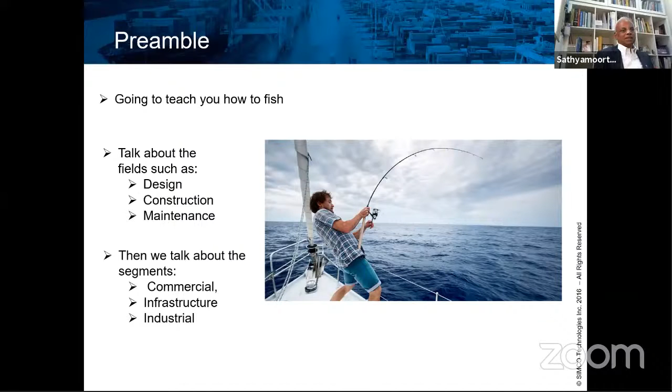Having said that, I'm going to teach you fishing. I'm not going to give you the fish. And all of you understand what this means. I shall be talking about fields such as design, construction, and maintenance in civil engineering. Then we will also talk about the segments: commercial, infrastructure, and industrial. It's a wide field, and let's go through that.

What are the merits of being a civil engineer? As the cliche goes, it's the oldest profession. The oldest profession in engineering is civil engineering. And the moment somebody put a roof over the head, we were in business. This is from the Stone Age, and you all know that. Civil engineering is also called the mother of all branches, and you will see it in the next slide.

Why I mentioned this is because I didn't even know other branches existed. I will tell you why. But before that, if a doctor makes a mistake, maybe he kills one patient. If a civil engineer makes a mistake, he could kill hundreds of people. So with that responsibility, being a civil engineer, I request you all to feel proud that you are what you are, and you are going to be what you are going to be.

How did I become a civil engineer? The purpose of this is to share my experiences and then guide you based on the experiences I have had in the past 40 plus years as a civil engineer. I come from a lower middle class.

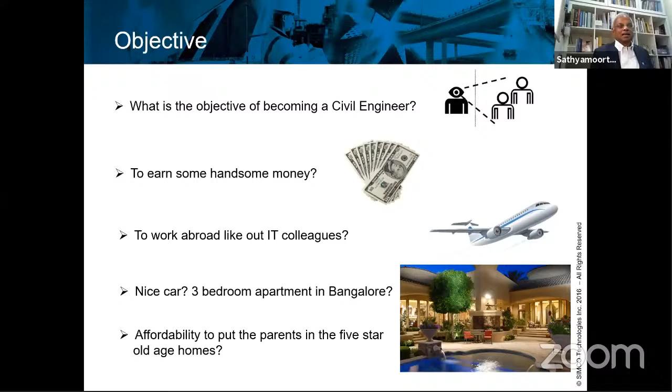Because when I was in India last time, I saw an old age home which was really looking like a five-star hotel. And I asked the guy, who are the people who could afford this? He said the children are all in the US and they put the parents here. Now, is that the objective?

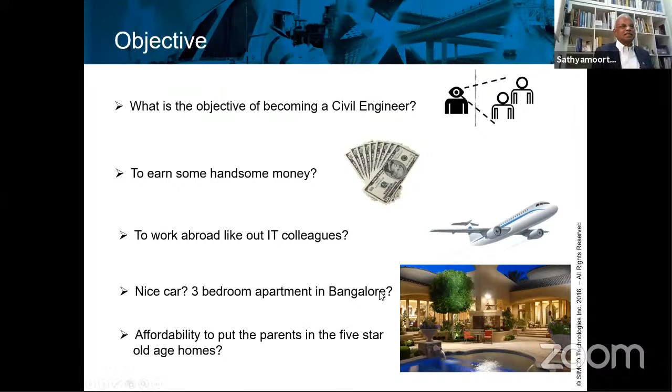Okay, let us introspect. Let's put priorities. My first priority that I want you all to think about is that you want to be happy in your job. That is the first thing I tell you. Money alone does not bring you happiness. See which job makes you happy.

I'll just give you an example. I was a civil engineer in the construction field for some time. And then I was picked up again in my life. Many accidents happen, all with good results. One German engineer picked me up to become a concrete repair specialist. I came into this field in the year 1990.

30 years down the line, I never left that field because I loved it. I'm very happy in that field, that I could contribute something to others. And I'm sticking there. I'm happy. I'm 70 years old, still working and going strong. Why? Because I'm happy in my job.

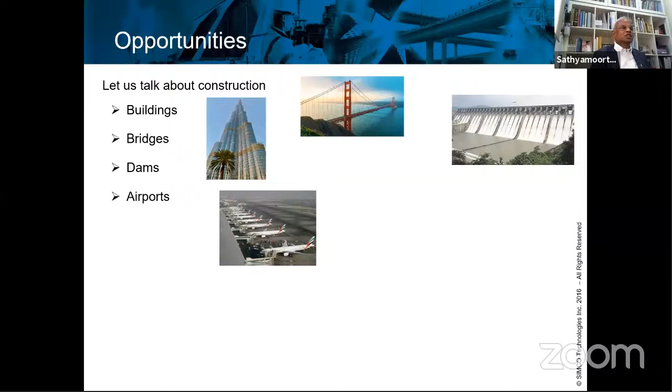I will talk about the airports in our country, how these are coming up. I have seen the airports in our country, how these were 20 years ago and what it is now after they brought in this PPP program, which is the private and public participation. The airports are to international standards and these are expanding. They're spending a lot of money on this. Everything gives us opportunities for a civil engineer.

Seaports. Now there's another special subject. Building something in the water itself is a challenging one. Not like when you go start working at a building site, you pour the foundations, you pour the slabs, you pour the beams. But when you come to a marine structure such as a seaport, the kind of opportunities you have to learn and practice and be unique is enormous.

Metros, more and more metros are coming up. I believe there is one in Bangalore as well, though I'm not 100% sure about that. I have been invited to take a look at the metro in Chennai because they have some problems and they asked me to come and inspect. Hopefully whenever the airlines open and I'm able to travel, I'll be coming to Chennai to inspect that metro. This metro, structures like this, you have over the ground structures like what you see now, and you have under the ground structures, because metro trains go over as well as under. Each construction is very unique and very special.

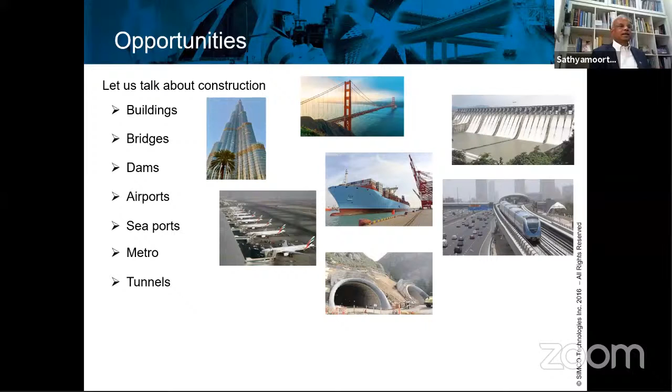Tunnels. It has been in the news quite recently. This is a picture of Atal Tunnel, which has been opened quite recently by the Prime Minister of India. There was a lot of discussion on the media because people reported, hey, it's the longest tunnel in the world. Then some people started saying no, this is not the longest, you have one in Europe which is more than 25 kilometers long, because this tunnel is roughly about 10 kilometers long. But what they meant by longest tunnel is that at a height of 10,000 feet, there are no tunnels in the world which are longer like this. This is 10 kilometers long at a height of 10,000 feet, because doing something at that height is a big challenge. You will be boring through the mountains. Again, another opportunity - I'm talking about the special opportunities for a civil engineer, where you can be unique.

Sewage treatment plants. The first time when I visited a sewage treatment plant, I was called there because the structure had a problem. The first thing that hit me was, oh my God, it smells so bad. But believe me, this is like a social service. If these sewage treatment plants function nice and good - because not only are there structures involved, there's a lot of chemistry involved. The discharge of this sewage is highly aggressive, full of sulfates, which is completely against a concrete structure. So what kind of coating you are going to be using, how the coatings fail, what problems you will see if you don't construct it well - these are all challenges that you face. These are specialty constructions, correct?

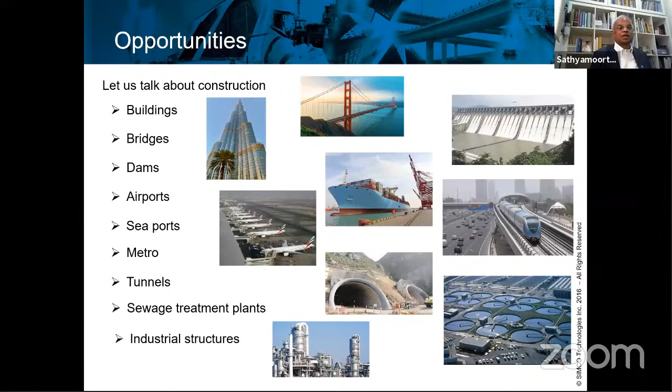The industrial structures - I mean not only the oil and gas, I'm also talking about non-oil and gas manufacturing. Not necessarily should it only be manufacturing downstream products of oil, but also now you have manufacturing of communication equipment. A civil engineer plays a role in building these plants as well as maintaining these plants.

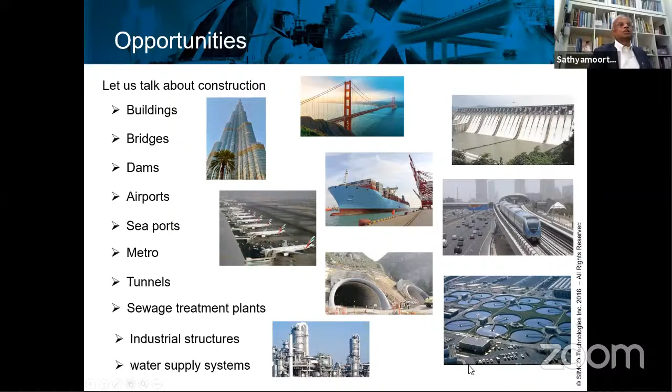And water supply systems - huge pipelines going above the ground, under the ground. Each pipe has got a joint. How do you join these pipes, which are 2 meters in diameter, without leaking? When you are passing drinking water through these pipes, how do you prevent the external groundwater from coming into this drinking water without polluting it? How do you prevent the drinking water flowing through the pipes from leaking into the ground? Excellent engineering that you can learn.

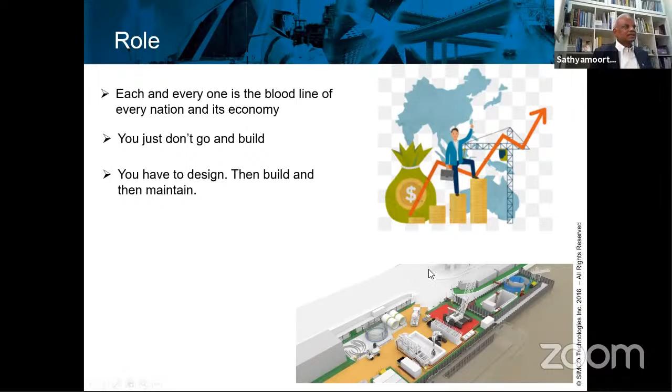Every role that you are going to play in the ones that I showed in my previous slide is a bloodline of every nation and its economy. A civil engineer plays a very, very critical role in building this. Now, are you going to just go and build? No - you have to design, then build, and then maintain. You will play a role in all three: design, yes; build, yes; and maintain, yes. Look at the opportunities, man. A civil engineer plays a role in each and every aspect.

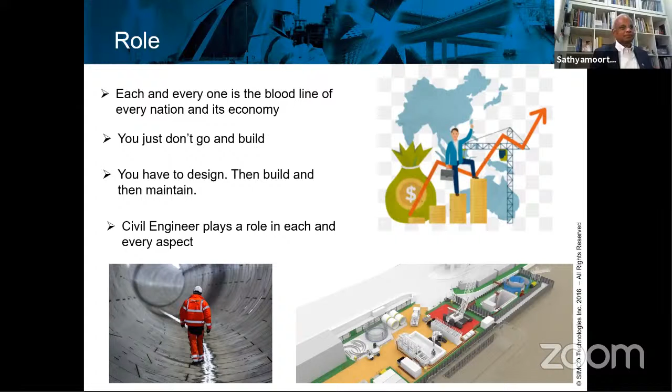When you talk about a design, here I'm going to take you through the specialties of design, not just a design by itself. When you talk about a design, what comes to your mind? Structural design - most of you are working with STAAD, etc. But how about a durability design?

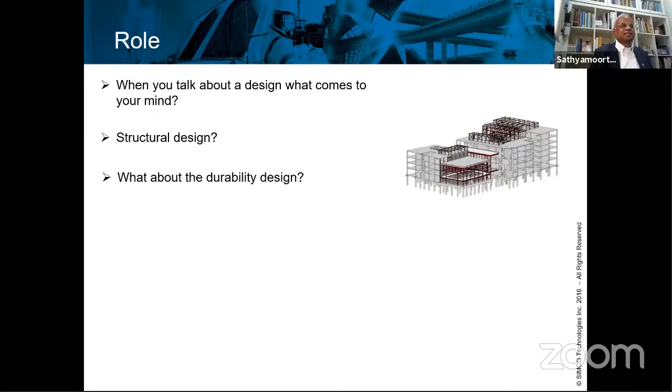I am sure you are touching base on durability during your studies, because when you are designing a structure like the one you see in this picture, you design enough reinforcement, the right thickness of concrete with the right compressive strength to make sure the structure is safe and won't fall down. But how do you make sure the structure is going to be durable for its entire life? That's durability design.

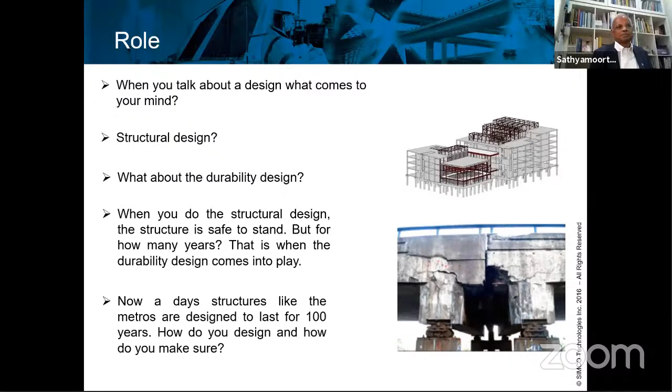We have tools available in the world which can predict the life, or remaining life, of a structure. For example, you have a chimney, or a marine structure, a quay wall or a jetty. The client wants to know: I built this chimney, I spent a couple of million dollars on it, what is the remaining life of this chimney? There is engineering available to predict the remaining life of a structure, which unfortunately you cannot do for a human being. You can never predict the remaining life of a human being, but we civil engineers can predict the remaining life of a concrete structure. That is possible, it's available now.

Construction industry is the second largest employment provider in India. I wonder what you must be thinking - who is the largest employment provider? Who is number one? It's agriculture. The second one is the construction industry, which provides the largest employment. If that can provide the largest employment, any number of civil engineers are not going to be enough.

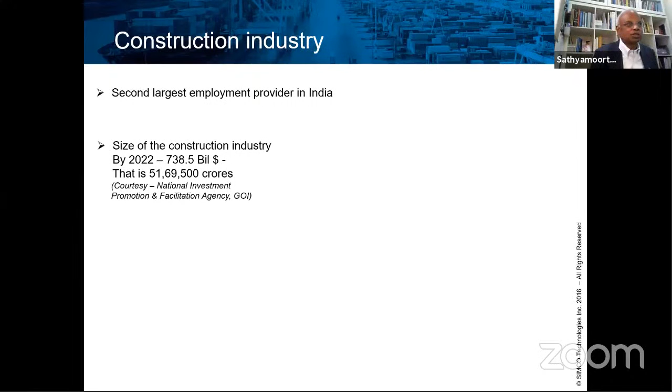What is the size of the construction industry by 2022? These figures are in spite of the coronavirus. They estimated it's going to be 51 lakh 69,500 crore Indian rupees - that's the size of the construction industry in 2022, which is not too far away. Why did I choose 2022? Because that is probably the time most of you will come out of college. That's 738.5 billion US dollars.

Now I'll give you another statistic. Not the whole construction industry - let me only talk about infrastructure. I'll tell you why in the next slides. When you're talking about infrastructure, the owner is normally the government. For infrastructure in the next 5 years - marine, which means port, power, water, sewer, highways - they have allocated 102 lakh crore rupees for the next 5 years for infrastructure development in India. That's a huge number. Imagine what kind of opportunities we have to work in all these fields.

What are the growth factors? You know they have announced smart cities. Last time I was in a place called Salem in Tamil Nadu, and the roads were being dug up right, left, and center. I asked, what's going on, what kind of project is this? They said it was connected to the smart city, because they were developing that tier 2 city with urban connectivity and other urban services - sewage, communication, and everything - developing it as a smart city. This was about 3 years ago when I was there.

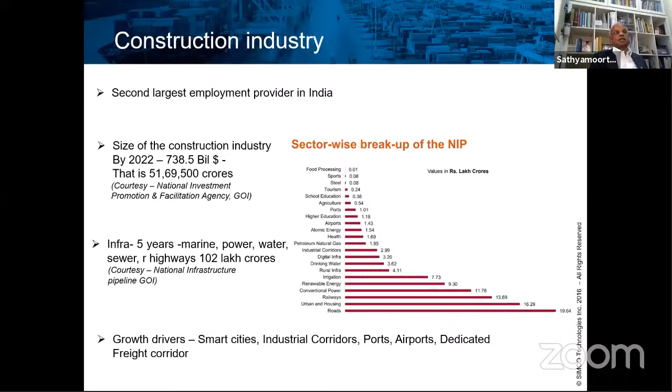Okay, you design the structure, you build the structure, you've got to maintain these structures. You've got to maintain these structures to last their design life.

For your information, code does not specify what shall be the design life of a structure, but it recommends. What it recommends is that for a structure such as a bridge, metro, or port, structures shall be designed for 100 years, or for any iconic building structure such as Burj Khalifa, which is the tallest building in the world, it's also built for 100 years. So the design life, when an engineer is designing, when doing a structural design, when working on major projects, you will also be looking at somebody working on the durability design part.

The durability is put in even during the time of construction to make sure that you are going to achieve its design life.

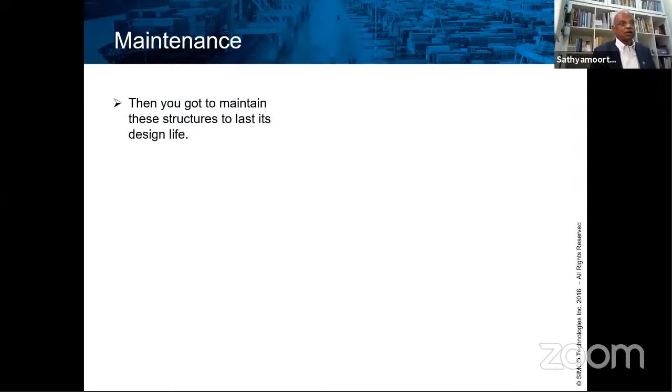So a civil engineer can play a role not only in structural design, but also in durability design.

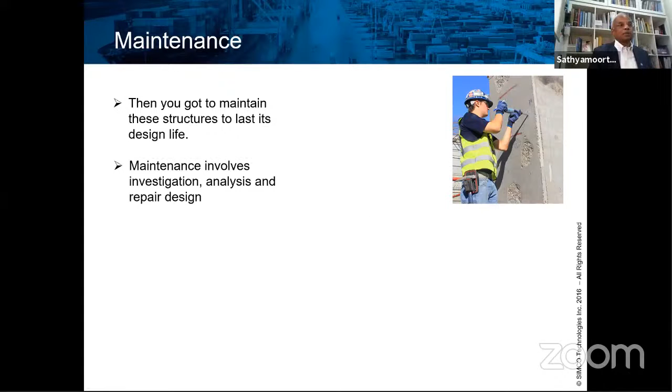Now I started talking about maintenance. Is maintenance a small subject? It is not, it's a very, very special subject. It involves investigation, analysis, and then after you find out what is the root cause of the problem, you have to do a repair design.

The investigation itself is a vast subject. It's a very, very big subject.

The people that you see are doing tests on the structure which can read what is inside it. They are reading the potential difference in the reinforcement in different areas to calculate their potential to corrode, by which the structure could get compromised. They also could read what cover is available to the reinforcement, and what are the spacings and diameters of the reinforcement. Everything could be done without opening the structure.

We have equipment now in the world which can read a 900 mm thick wall without opening it, and it can detect the voids, the condition of the reinforcement. It can detect everything like a doctor checking you when you go for an investigation. We have equipment that are available, and this all comes under the maintenance of a structure.

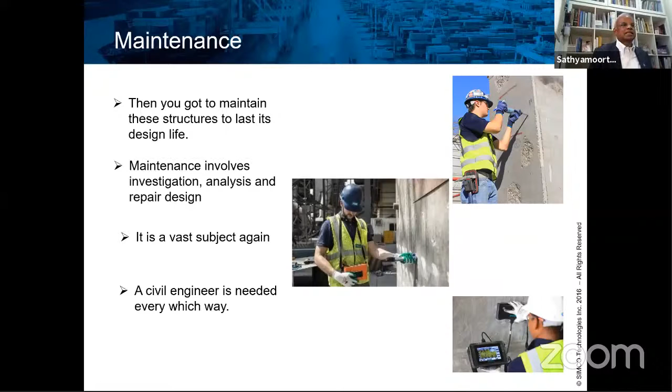When you're going to maintain a structure, you have to do the testing, investigation, analysis, and also a repair design. As I said, it's all a civil engineering subject, by the way. Repair industry, repair involves construction chemicals.

Roughly about 23 years ago, I came to Delhi to open a branch in India. I stayed there for 5 days. I went around, had several meetings with consultants, contractors, and owners, meaning the end users. When I talked to them, I was so disappointed. I came back without opening a branch, because whenever I talked about repair, people were talking about sand, cement, mortar. Okay, you have some corrosion that has come, just remove the loose concrete, plaster it again using a sand and cement mortar.

I was so disappointed because the knowledge of construction chemicals was so low. Even though construction chemicals were present 22, 23 years ago in India, the knowledge about their usage was missing. As a result, construction chemicals have now become such a massive industry in India, and you as a civil engineer have a role, which I will tell you, wow.

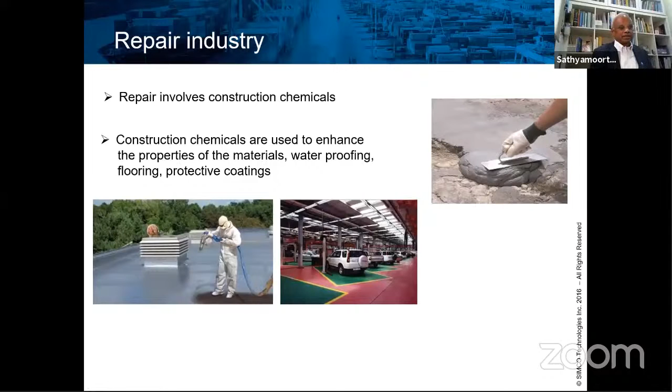This is also a part of construction chemicals - protective coatings. The one that you see is the protective coating applied to Dubai Metro. It was done 12 years ago, and it still looks as new.

What is the big advantage? The big advantage is that this structure has got 100 years of design life by applying the right protective coating by the right guys. It would last its design life.

Again, this is construction chemicals, but look at the size of the industry. The size of the industry is 10,000 crores per annum, and civil engineers have a role here.

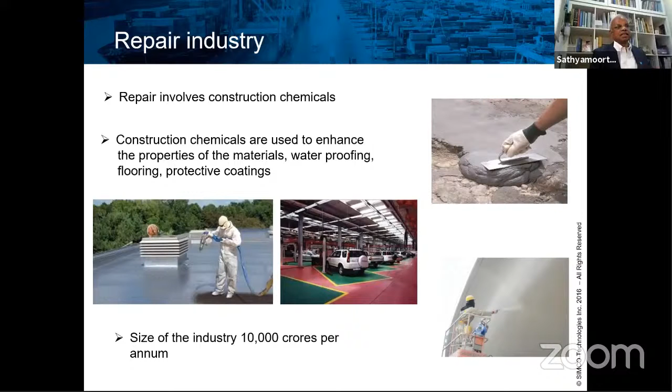IBMS - I was part of the International Advisory Committee of this IBMS. When I was invited to join the Indian Bridge Management System, I gladly did that because I had colleagues in this international committee, people from US, Australia, and Britain. They were all my colleagues. The contribution we were supposed to do was to transfer any knowledge we had acquired to India. That was the purpose of that committee. I was part of it until it was finalized.

Now, repair engineering is an exotic subject. Take, for example, our home - you see lots of bridges and culverts for the road transport.

Suppose you travel in a place like Bangalore, you go over the overbridge - that's one structure. If there is a river, it's a river bridge, another structure. But there is a small culvert which is only draining some rainwater sometime, another structure. When you travel on national highways, you have bridges. When you travel on a state highway, you again have bridges and culverts. When you travel to a village, again you have some bridges in some places, though not many.

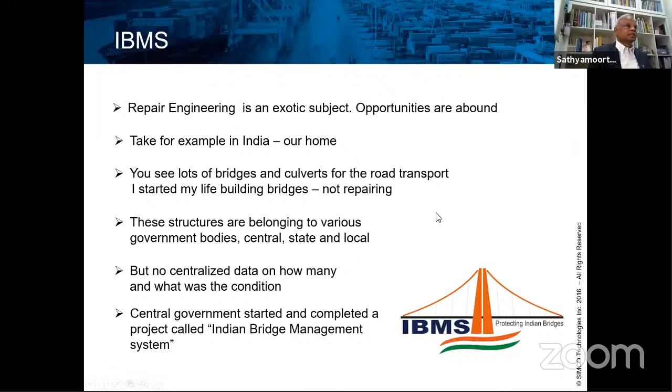We recorded 1.7 lakh bridges that were inventorized. Not only that,

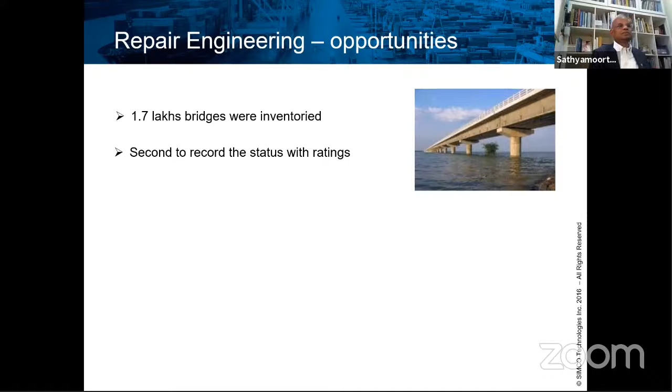the second step was to record the status with the ratings. You see the bridge - the bridge has got a number of spans. So we had to count the spans, check the length of each span, and then give a rating to the bridge. What is the rating to the bridge? If it's very good, give a rating of 10. If it is medium, then you bring the numbers down. So based on everything visual, we gave the ratings.

Third, to identify the critical ones to immediately repair. There are bridges which are in such a poor state - we found bridges more than 100 years old which were literally falling apart. What could happen is if any one of these bridges could fall down, the economic development of that segment which the bridge connects would be affected.

Suppose the bridge falls down, and maybe that happens to be the only bridge - there are no goods traveling to the other area, so there is an economic downturn to the other area. So it's also connected to social problems. So the bridge is an important asset. So we identified those, and then we identified thousands of critical structures which are to be immediately repaired.

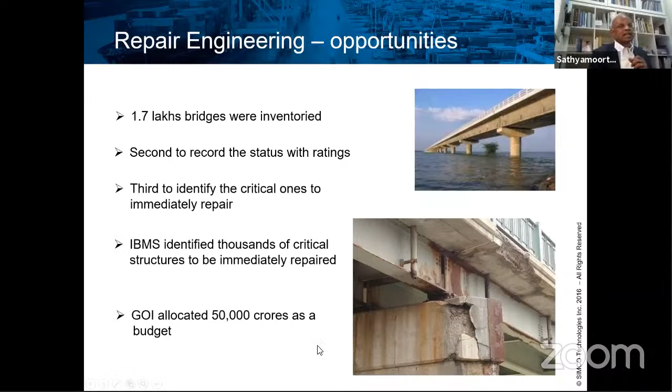And the government of India has allocated 50,000 crores as a budget for this project alone. The 50,000 crores involves inventorizing, getting the consultants on board, and putting together the repair package and repairing it, which I will explain in the next slide.

There are 3-stage implementation. Stage 1, rating. They needed civil engineers - actually, we had to train the civil engineers on how to do the rating.

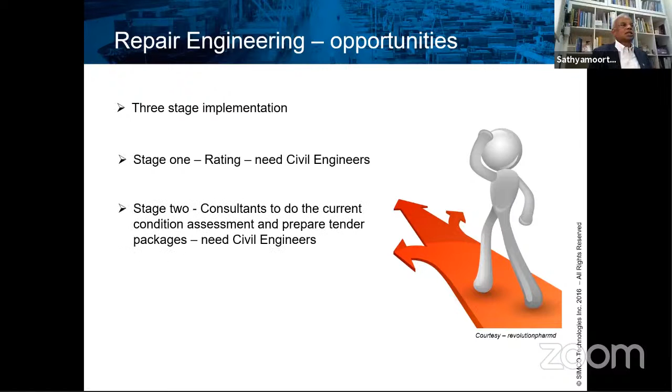Stage 2, consultants do the current condition assessment and prepare tender packages. They needed civil engineers again. Once the repair construction is awarded, they need civil engineers for those companies to execute this.

So look at the opportunities you have in the repair engineering part of it. And I'm talking about only one segment, bridges, but there are many more which I'll talk about later. So railways - so far what I've talked about is a small drop of what's available. Now, I mentioned road bridges.

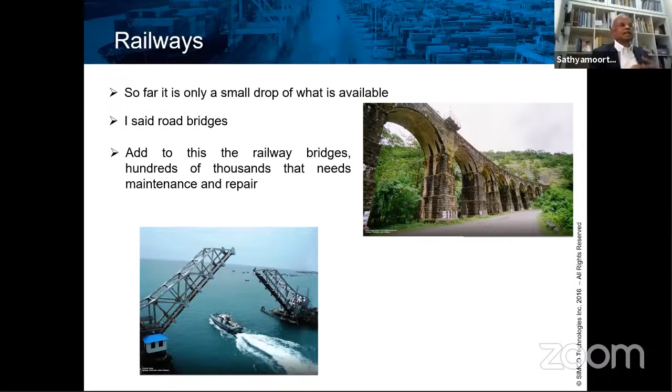Add to the possibilities the railway bridges, some of which are more than 100 years old, such as this. Some are engineering feats, like this Pamban bridge, where the railway bridge goes up to allow ships or boats to pass. And some unique ones - this is a bridge on top of the Chenab River in Kashmir, one of the highest bridges. Afcons, who are infrastructure contractors, are building a second one, and they're going to open it next month or so.

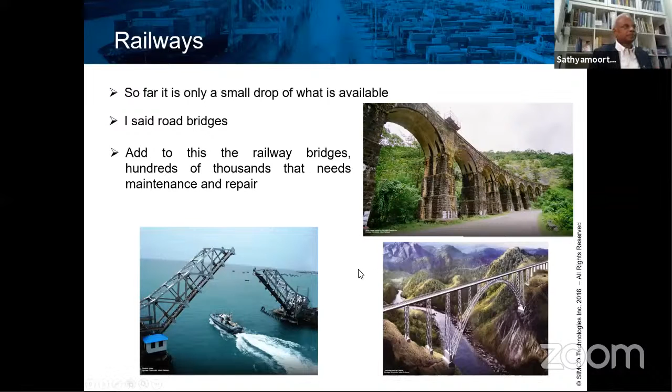Now we talked about the bridges, highway bridges. We talked about the railway bridges. Let's talk about the ports.

We have the Sagar Mala scheme, which is a brilliant idea for us because as a subcontinent we have one of the longest shorelines in our country. The cheapest form of transport is through water, not through the road. Road is the costliest form of transport. Rail is the second costliest, less costly than road. The cheapest one is by water.

And that is why if we connect India through the ports, it's a brilliant project, a brilliant concept. The government is investing tons of money in this. You have opportunities to participate in these projects.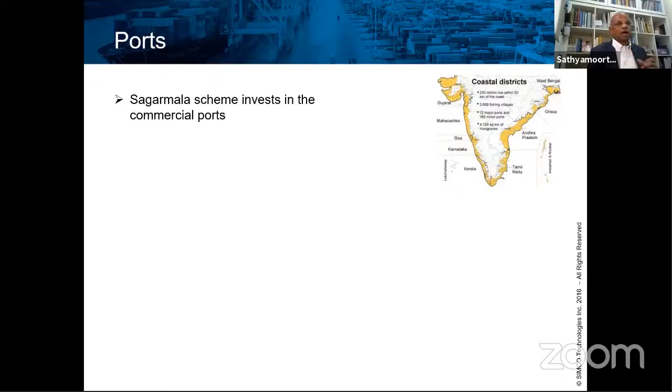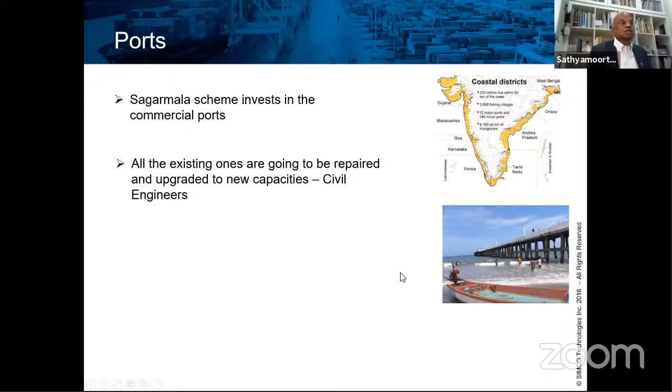Why? You see, this is a small port in Pondicherry, where I come from. This is just a jetty, and they are developing it as a port because you have to do dredging to bring in larger boats, and they have to build loading and unloading jetties. If we can bring material from Chennai to here, or from Tuticorin to here, connecting all the places along the shoreline currently marked in yellow, the kind of savings you'll have on fuel alone is enormous - billions of dollars every year. And as a civil engineer, you get tons and tons of opportunity to work on all those things.

How about the naval ports? You see, now we all know what's going on with our neighbors, especially China. So the government is looking into maintaining all the ports and airports to make sure we are going to be ready. We are not going to be caught by surprises, which means I'm sure they are looking for good engineers with port experience.

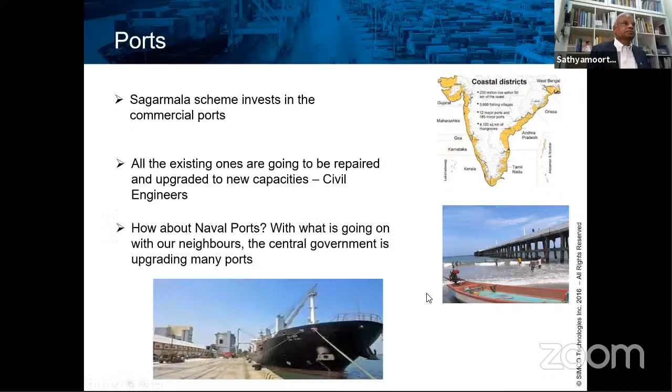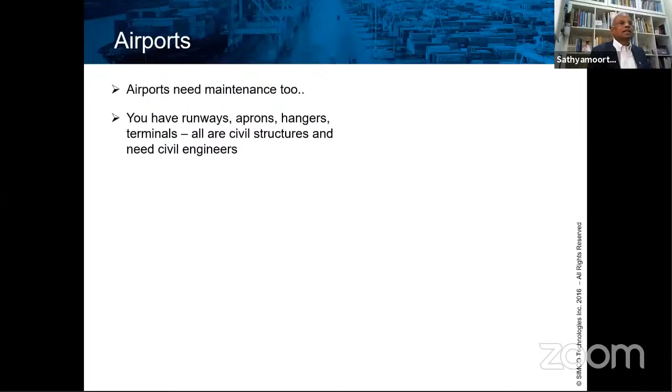Airports need maintenance too. You have runways, aprons, hangars, terminals - all civil structures, and they all need civil engineers. The government is building tier 2 airports and upgrading many existing ones to international airports.

The ones you see here, these are all the airports. And if I compare only the place where I come from, this Pondicherry airport is a couple of kilometers away from my home. You have an airport, you have people maintaining it, people manning it, but no flight comes in, no flight goes out. If you can develop that airport to take freight or passenger transport - that's an initiative taken by the government. They are building tier 2 airports, and when they connect all the cities appearing here, it's a massive opportunity, a massive building opportunity.

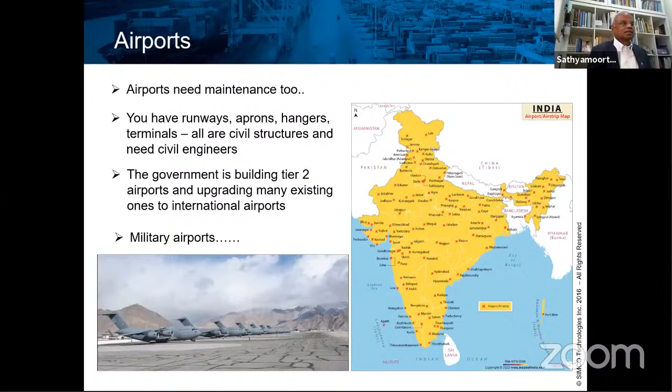Connect this to the military airports that are going on - this one is in Ladakh. You can see the apron there, with all the cracks and everything.

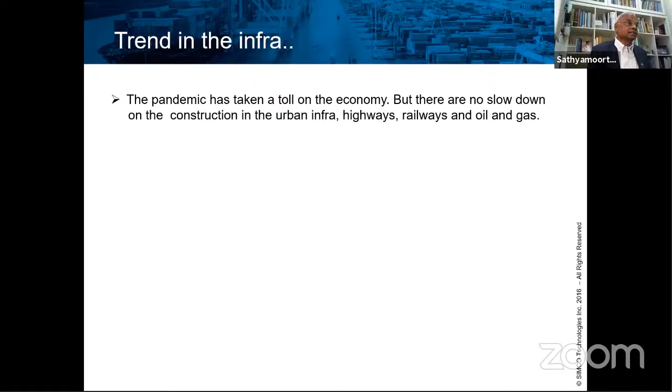Now let's talk about the trend. The trend now is infrastructure. Why? I'll tell you why. The pandemic has taken a toll on the economy, but there's no slowdown in construction in urban infrastructure, highways, railways, and oil and gas. There are slowdowns in other areas, but not in this area. They are still going ahead with this.

I'll tell you why. Economies over the world would concentrate on infrastructure to fill the gap and take off the economy. Because what happens is this - you take Canada, that's where my office is.

After the pandemic is over, the Canadian government is going to inject hundreds of billions of dollars in upgrading and repairing infrastructure, meaning bridges and tunnels in Canada. Why do they do it? Because they have to kickstart the economy, and that is going to happen after the pandemic.

Every government in the world, whether it's India or anywhere else, will be concentrating on infrastructure. That is why I said the trend to look at is the infra sector. There will be a huge demand.

The National Highway Development Program by GOI is creating the biggest opportunity in construction. I was traveling between Bombay and Pune, and I was seeing the hectic activity of road building. I believe it is the case all over India.

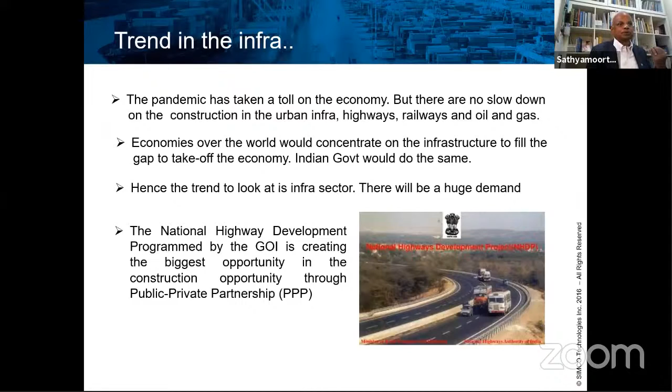Now, how about railways? This is one of the biggest employers too. They are modernizing many railway stations. I see on their website that they show a station which is existing, but they modernize it and it looks like an airport. One station in Delhi — I don't know if it's finished — at least they were doing a concept design, and it was looking like an airport.

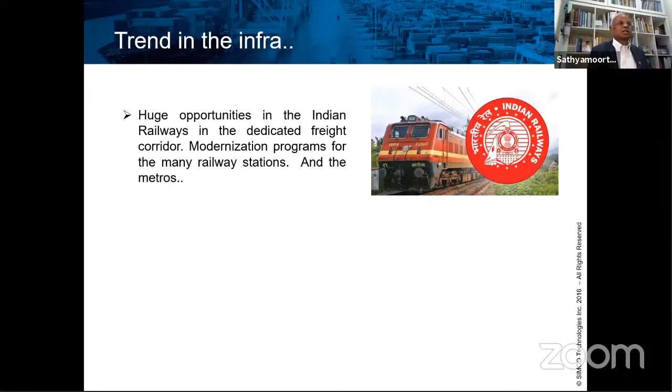It's really wonderful, and the metros too. Not only the railways, but also the metros are connected to this infrastructure, and it's going to provide a lot of opportunities for people like you, the civil engineers.

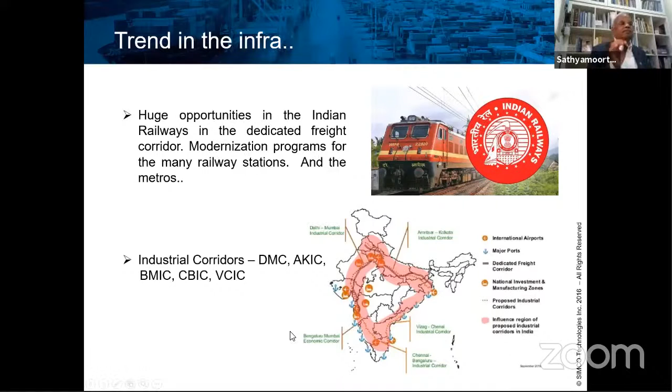Now, other than that, we have industrial corridors. You can see these industrial corridors cover mostly areas near the sea, because that facilitates an additional opportunity for transportation of goods, whether raw material or finished goods. They are connecting all these industrial corridors by roads, rails, and sea. That is when massive amounts of money are being invested in this infrastructure building.

Oil and gas, upstream and downstream. Extraction of the oil is called upstream. Downstream product manufacturing is called downstream. So you have to design, build, and maintain. You have opportunity in all three areas.

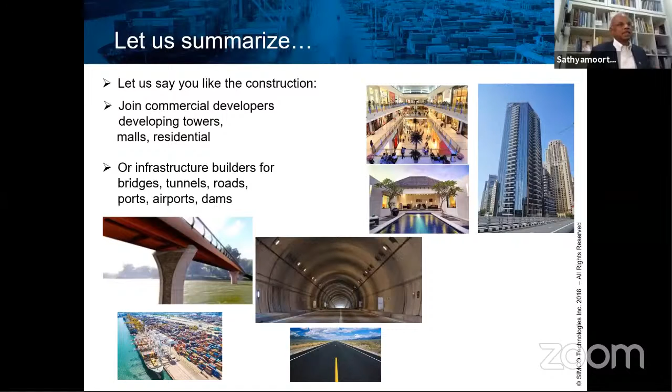Or, in construction, you also have another choice: you can join infrastructure builders, people who are building bridges, tunnels, roads, ports, seaports, airports, and dams. So you can join any one of those areas. Why I talk about all those things separately, I'll tell you now.

Or you can also join industrial builders, the builders who are building plants for oil and gas, power, sewage, and water supply. For example, if you're building a structure for an industrial plant, you have dynamic loads involved, which you may not have in some other structures. So you have to become a specialist in that. Each one has its own specialty. If you're talking about pipelines that carry water, I told you last time about the joints and leakages.